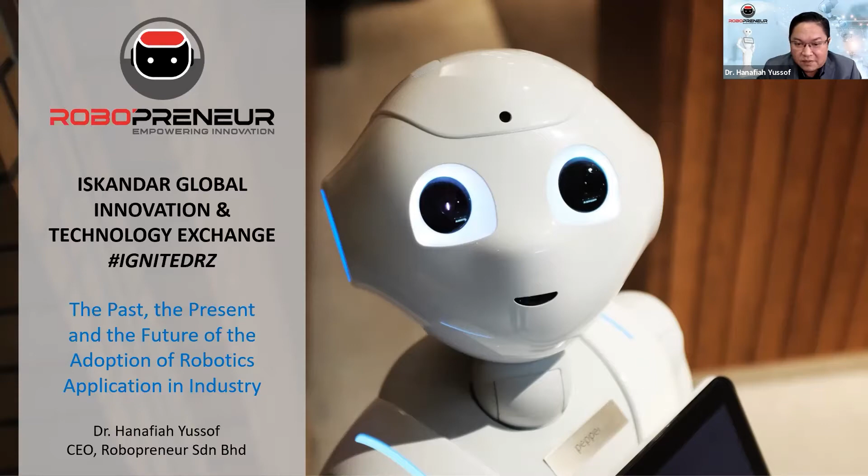Well, the topic is very broad, and I think it's impossible to cover everything in 15 minutes, but I'll try to focus on important subjects. Knowing that the attendees today are very keen and passionate about robotics and drones, and that we have our Malaysian National Robotic Roadmap currently towards establishing the Malaysia Robotics Policy, I will elaborate the history of robots towards the future in three main elements: the industrial revolutions, robotics technology growth, and the combination of robotics and AI.

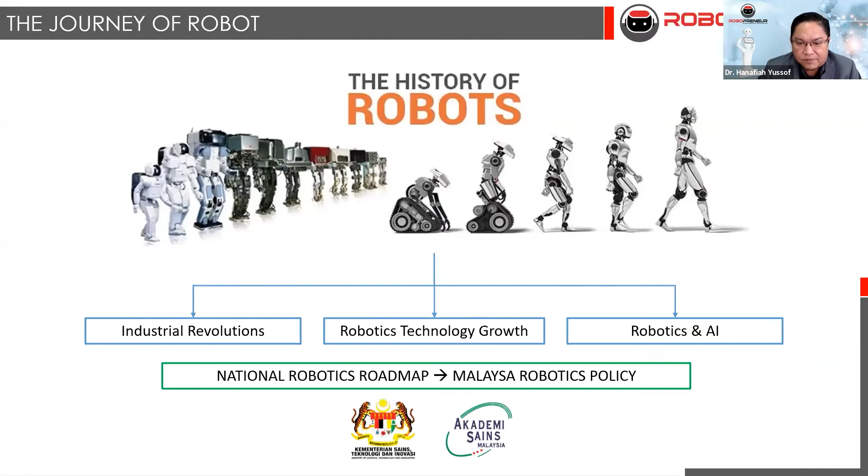Before I go further, I'll let everyone know that I'll be quoting some data and findings compiled for the National Robotic Roadmap, of which I'm one of the committee members.

From the Industrial Revolution perspective, everyone knows about our Industrial Revolutions, and recently Malaysia has launched our first IR 4.0 policy. I think robotics will be one of the main pillar enabler technologies to succeed in this policy.

Looking back at Industrial Revolution history, in Industry 1.0 robotics just started, very much focused on mechanical hardware design, mostly manually operated to help humans lift heavy objects, mechanization and so on, with quite limited usage.

Moving to Industry 2.0 in the 19th century, robotics became more prominent in helping industry succeed in mass production. At this time the mechanics of the robot were combined with electronics, and some simple low-level programming was introduced to increase speed, and automation began.

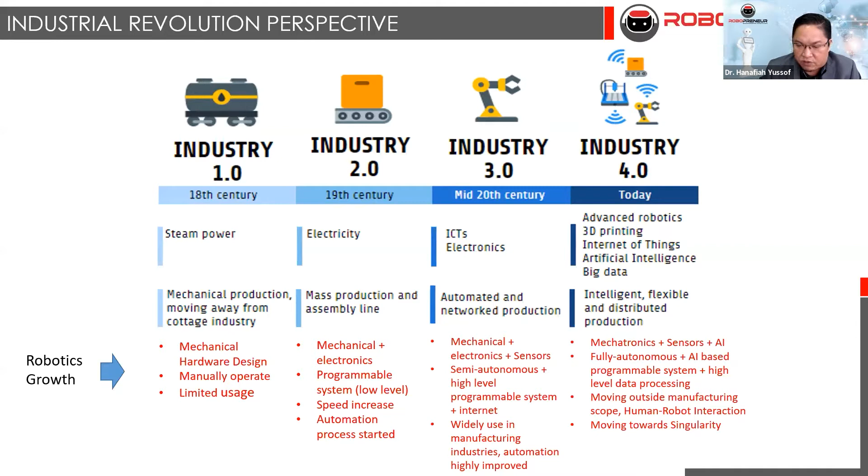Towards the maturity of AI in future, we are actually moving towards singularity. This singularity is one interesting topic, maybe we can discuss it - the event where AI becomes very intelligent, more intelligent than the capacity of human thinking.

From the perspective of robotics technology growth, there are 5 generations of robots. Now we have seen a lot of robots in industry - these are classified as the first generation, focusing on industrial and manufacturing automation. The second generation is moving towards service robotics, where robots become more common in daily life, used as a medium to solve human problems. It already goes out from the manufacturing landscape to be more human friendly, more intelligent, more interactive, and also mobile.

The third generation is ubiquitous robots. This is where the robot becomes more intelligent and able to work with different devices, connecting them into a smart environment - it is networked. It has the capability to understand human emotion, and it is being used to accelerate digital transformation in industry and businesses.

The fourth generation is a very interesting topic. We are still at the R&D level, where the robot becomes more genetic - an artificial species that combines some biological aspect into the robotics structure. Nowadays we have artificial skin, artificial muscle, soft robotics, and this is the main component pushing towards genetic robots. The highest level, the fifth generation, is biorobots.

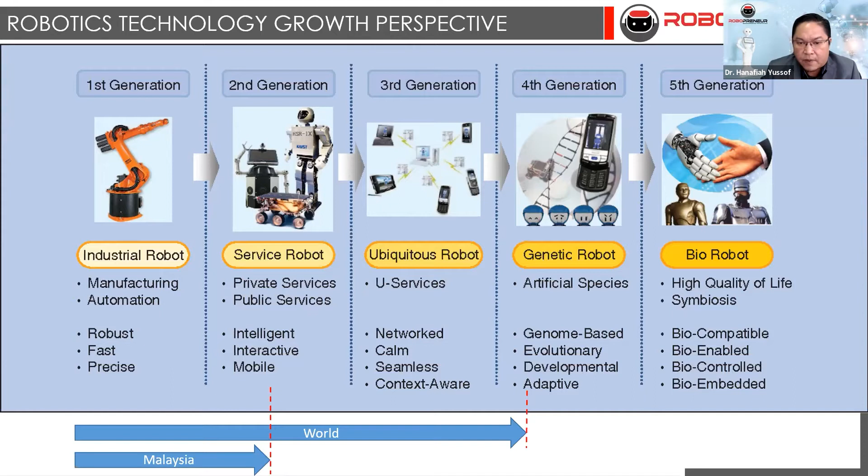From the robotics and AI perspective, I will use this chart from PwC talking about the journey of robotics and AI. At the early beginning of the 20th century, the AI concept was introduced, using Turing tests and evolving the 3 laws of robotics, with some testing conducted at this time. Starting from 1950 and above, we already had intelligent machines, the transformation from manual operation to semi-auto, and robots able to connect between computers and clouds. We have also seen connectivity evolve together with the growth of internet technology.

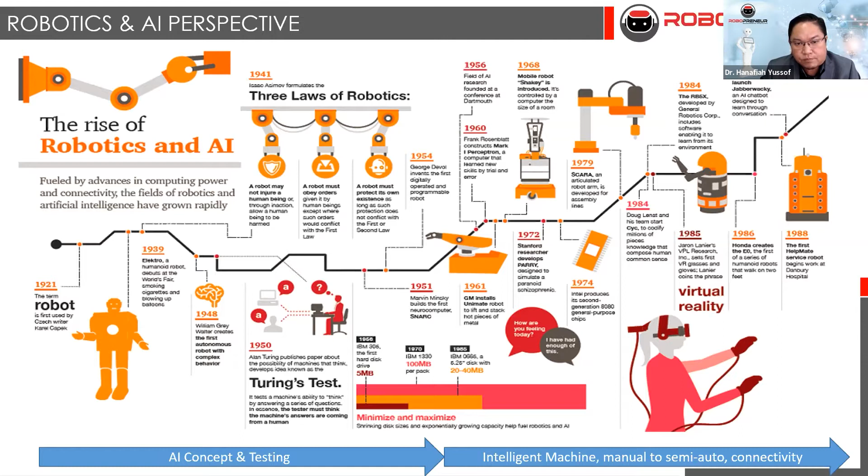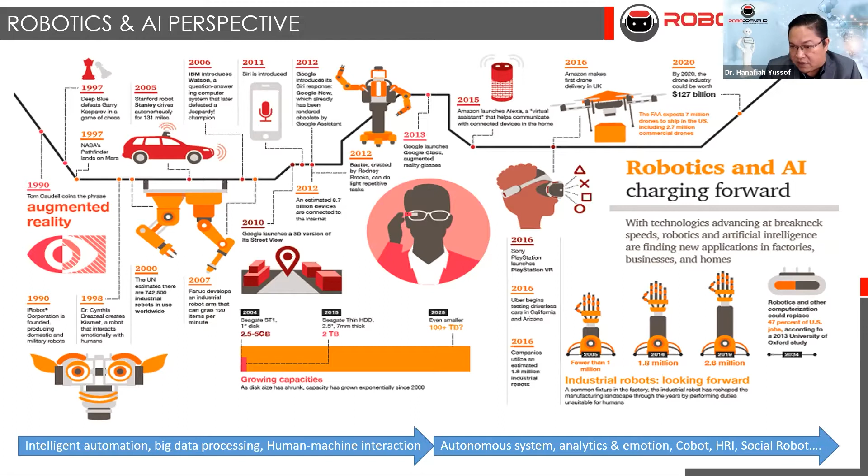Moving forward into the 1990s, we have intelligent automation, big data processing, and human-machine interaction - this is the beginning of Industry 4.0. Nowadays and moving forward, we are experiencing a lot of autonomous systems, high capability robots to do analytics and understand emotions. We have collaborative robots, a maturity of human-robot interaction, and nowadays a term so-called social robots. This is a very accelerated area - we believe that if previously it took about 50 years to transform between one segment to another, with this speed of internet and data processing, robots and AI become much faster to adopt.

Before we go further, I will introduce the real classification of robotics taken from IFR. We have 3 classifications of robotics: industrial robots that work in manufacturing, service robots that work outside manufacturing, and collaborative robots, which is the area overlapping between industrial and service robots, where human and robot work together on the manufacturing side.

If we define based on hardware platform, we have robots with 2 legs, called biped, and 4 legs, quadruped. We have mobile robots, AGV, flying robots, UAV, underwater robots, called ROV, robotic arms, and also crawling and climbing robots. This platform is the pillar for how we want to strategize the development of robots - we have to see what are the basic platforms we want to develop for that particular robot.

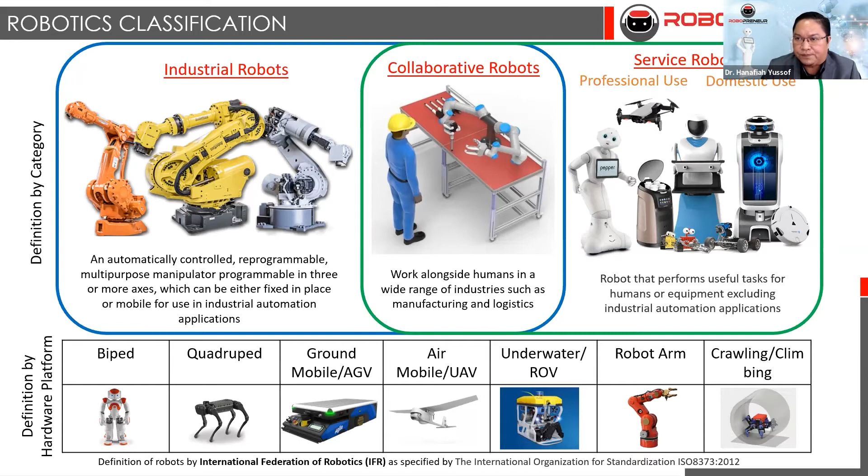So robotics, AI, and automation are actually 3 important keywords which are intercorrelated with each other. They complement each other in the way that for modern robotics, it's no longer a purely hardware structure. It needs some sort of intelligence and cognition provided using the intelligence of computing for AI. And then we have the way of doing things, which is automation, where we automate some sort of process, and robots become the enabler for these automations.

For the application of robots in various industries, we need to have a lot of R&D, innovation, prototyping, and commercialization before we can actually apply it to industrial, professional, and home use. So both automation and AI are very vital for successful robotics development and ecosystem. Eventually, thriving robotics technology will lead to new applications and adoption. This is actually the main pillar that will give impact in terms of economy and social life, so it's a very important technology that we need to focus on.

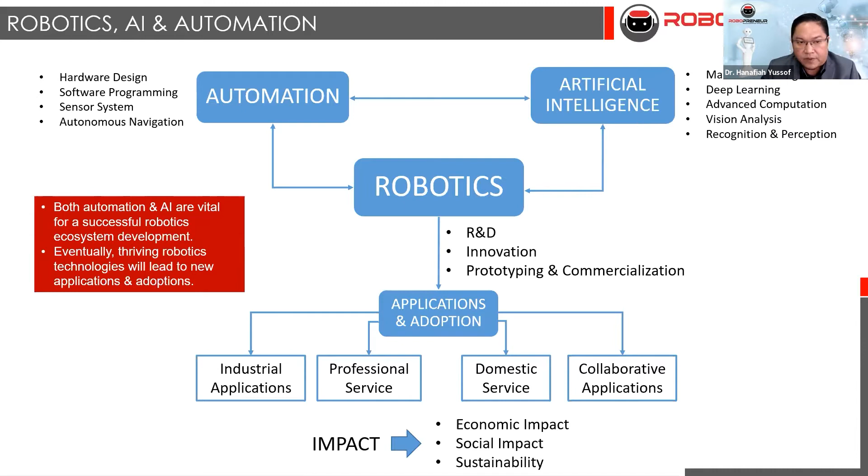So now I will explain more on the trend and market of robotics. The global trend right now is still very much focusing on manufacturing in terms of the quantity of robots that have been deployed. But then there are a lot of areas that robots are being involved in. For example, in medical and healthcare, security and surveillance, warehouse automation is a very important segment right now for robotics application. Service and consumer also, yeah.

There's a lot of robots that are being used as partners, as a medium to help restaurants, hotels, and so on. And very importantly for Malaysia, we are focusing very much on food and agriculture because our country is basically an agriculture country. And there are some elements in robotics that have diversified into other smart systems, where sensing and vision play an important role for robots to combine and collaborate with other smart systems.

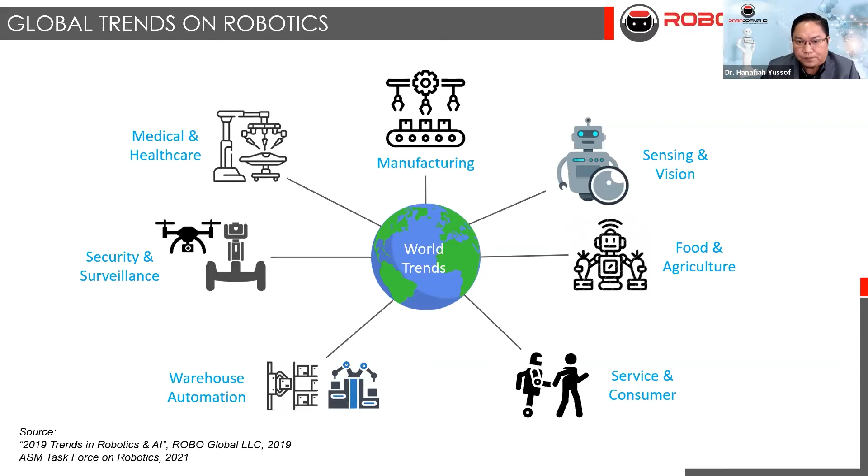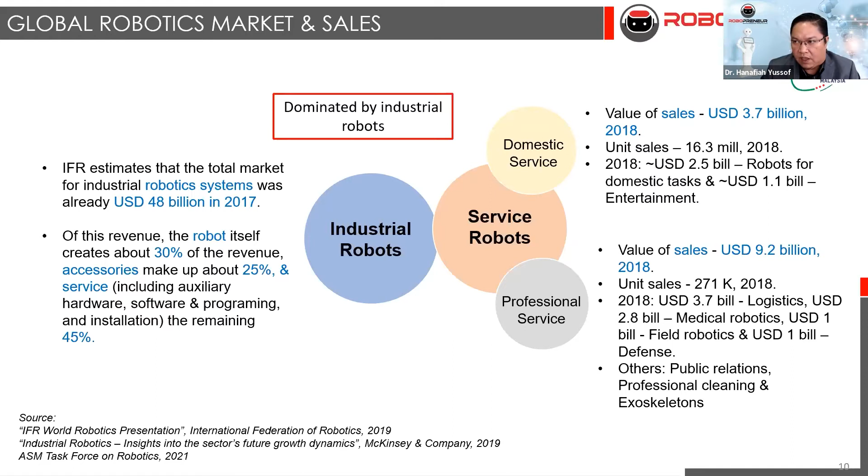Looking at the robotics market and sales, it's still very much dominated by industrial robots. But the growth of service robotics is quite interesting, where the number of robots being sold globally for professional service and also domestic service is actually growing very fast. The importance of this robot is moving from the dimension of doing very day-to-day operations to becoming a robot that is able to collaborate with humans, and this is able to solve a lot of problems in non-manufacturing areas.

This is a chart taken from IFR, the annual installation of industrial robots. We can find this report on the IFR website. But the thing I want to highlight here is that Asia is the largest market of industrial robots. The number of deployments in Asia is actually the highest, meaning that the market in Asia, where we are - Malaysia is in Asia - we have a better chance in terms of application of robotics in industry.

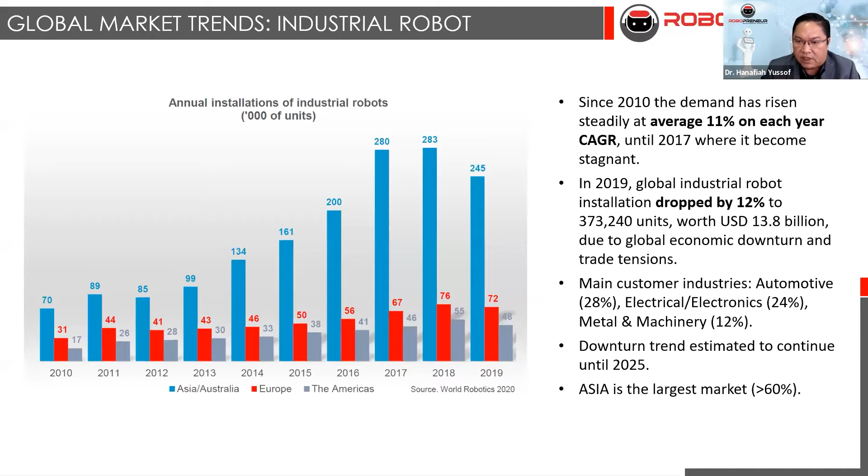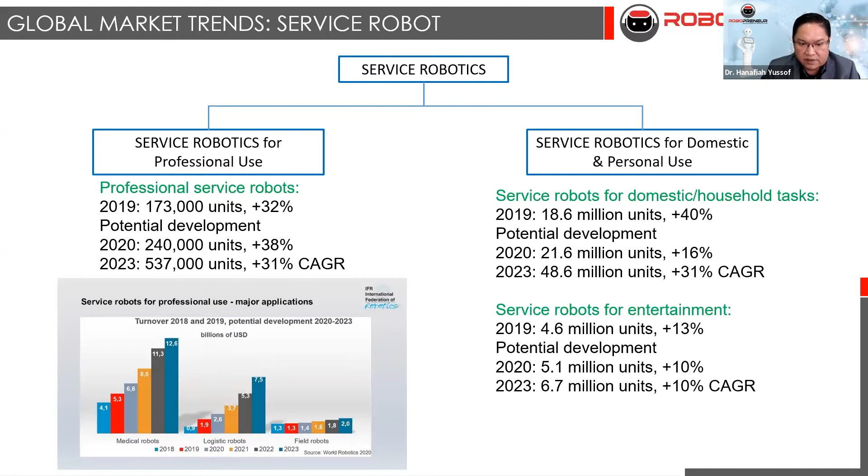So this is service robotics. We have seen growth in service robotics for professional use and also some domestic use. I would like to highlight here the 4 areas that are growing right now in service robotics. The champion now is logistics, followed by medical, field robots, and defense.

This is some typical examples of how robotics is being used in today's industry. Like Amazon - if you order anything from Amazon, most likely your order will be handled by one of the 200,000 robots in Amazon's warehouse. And the history of SoftBank, by acquiring Aldebaran Robotics to develop Pepper, and then Boston Dynamics, which they recently sold to Hyundai. And SoftBank Robotics is now the biggest owner of AutoStore, a solution for warehouses. We also have this company called Zoox, providing autonomous car solutions. They are at the highest level of readiness right now, and it's quite interesting to see how they're going to deploy in the mesh environment.

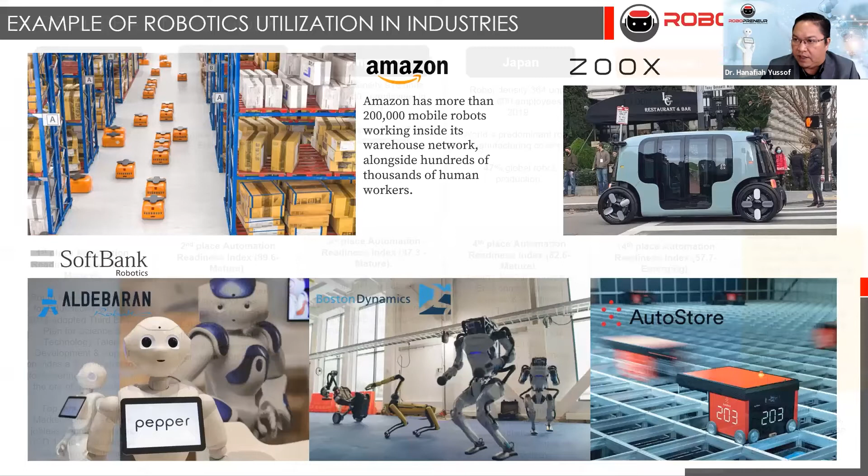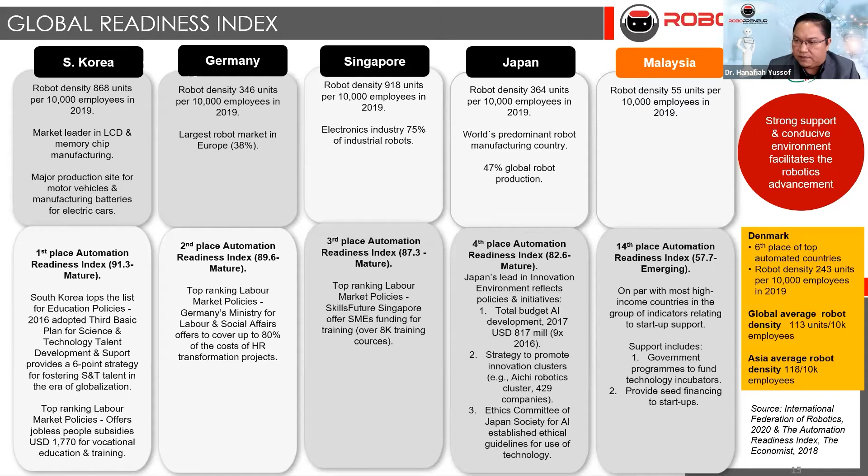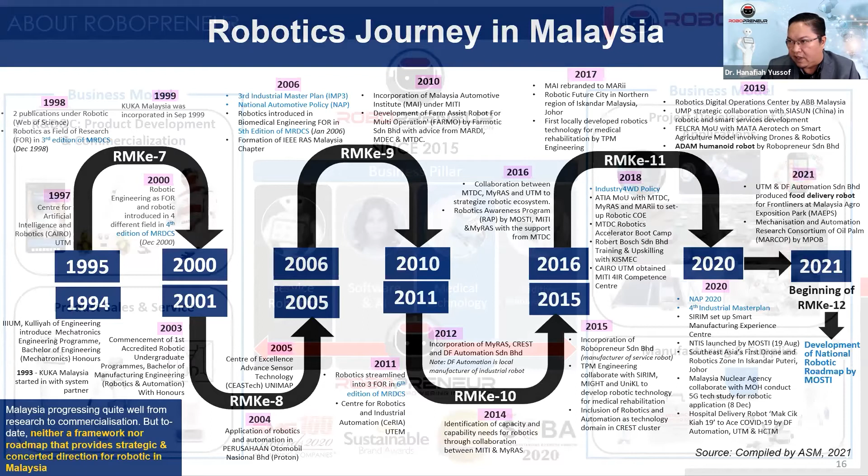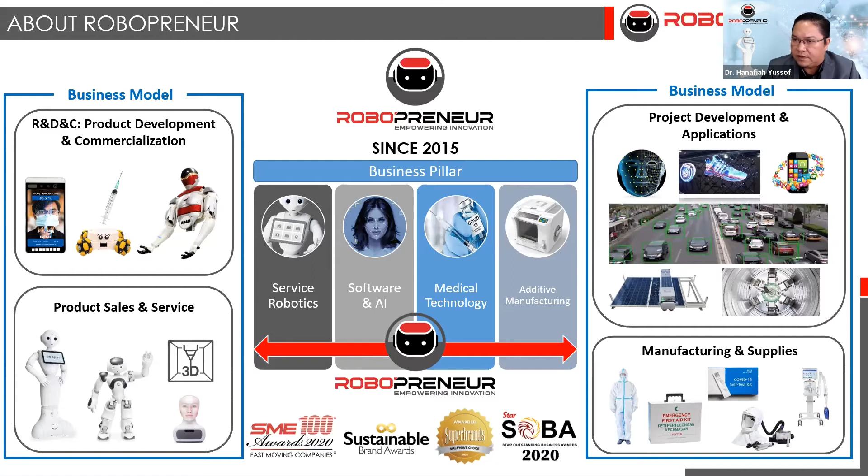Doctor, we are currently slightly out of time. We'd like to see whether you can speed up and wrap up your thoughts so we can proceed. I think that's all for 15 minutes - it's very short. Maybe we'd need 1 or 2 hours to explain everything, but it's okay. We have another round of forum session after this where we can have a discussion. Thank you, everyone.

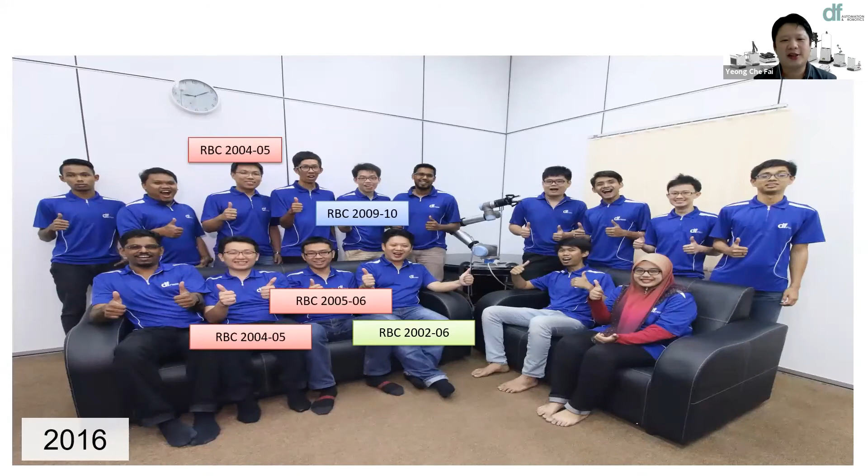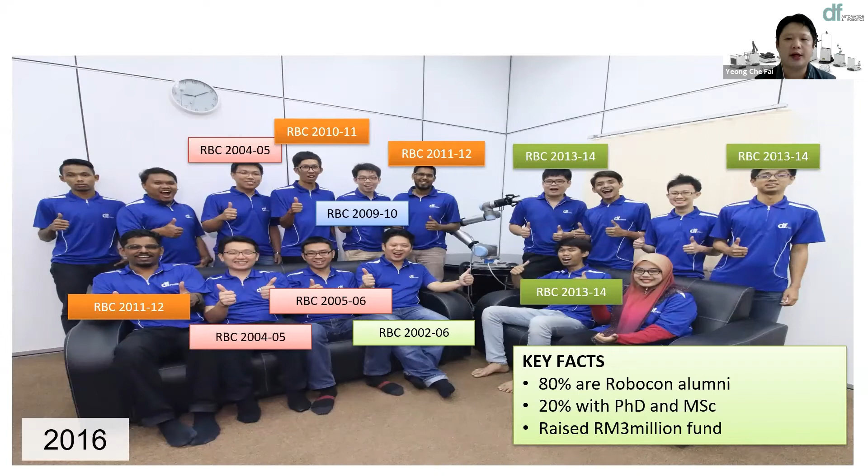Then in 2014, we had more students grow the business. In 2015, we increased more. In 2016, if you look at this group of the team back then - this is everyone who joined RoboCon, which was held in Malaysia. RoboCon provided students a way to learn their talent and polish their skills, and then DF Automation had the opportunity to hire them. Then in 2017, we increased further.

And this is 2019 - we already had 60 staff. And this is actually the picture we took just before the MCO. Of course, we cannot take this picture anymore.

So in a very short period of time, about 8 years, we increased from 3 founders to about 60 or 70 right now. It's thanks to the ecosystem in Johor Bahru, and also because we are very near to UTM.

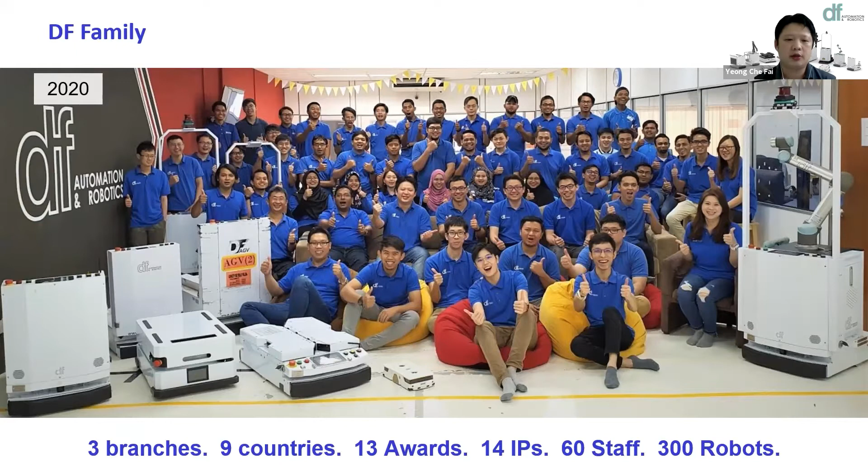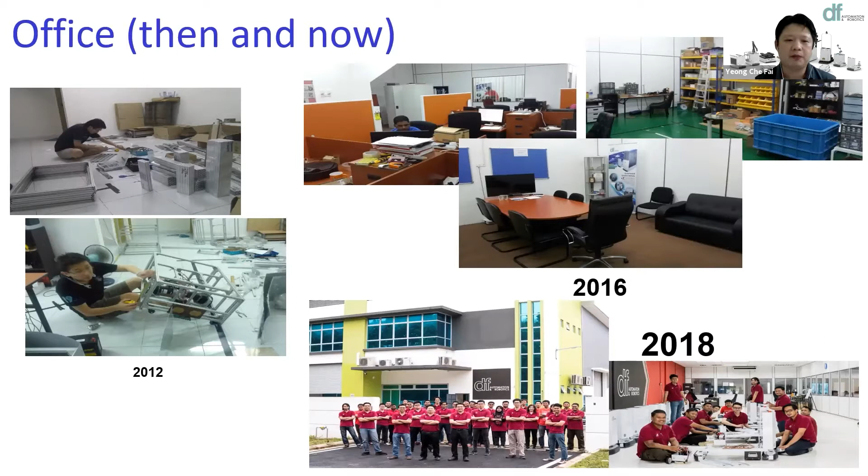When we first started, we didn't start big, we started from home. Then we used a shop lot in 2016. In 2018, we had a factory. As of now, 2020, we have 2 factories in Johor Bahru, 2 branches in KL and Penang, and also a branch in India. That's pretty much my journey of entrepreneurship.

So I just want to share a bit about DF Automation.

Our customers are really manufacturing plants that are huge, about 20,000 square meters.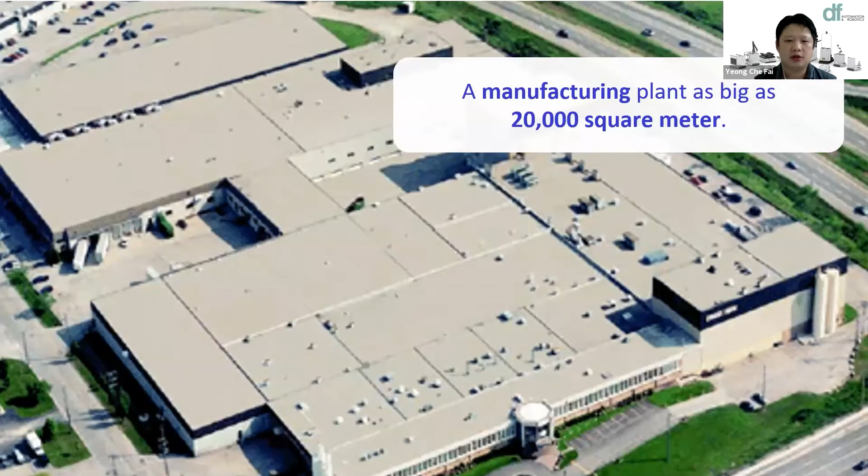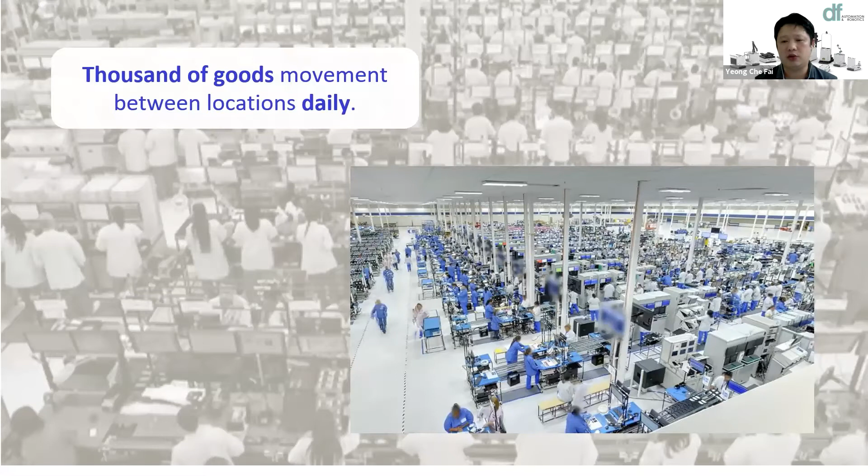Every day there are 1,000 goods movement between locations daily, either from warehouse to the production line, or from the production line, after they finish goods, they go to delivery and so on. Most of these operations are carried out by workers and operators, and some of these workers need to push or carry up to 500 kg per day and walk up to 3 kilometers. So these are huge problems.

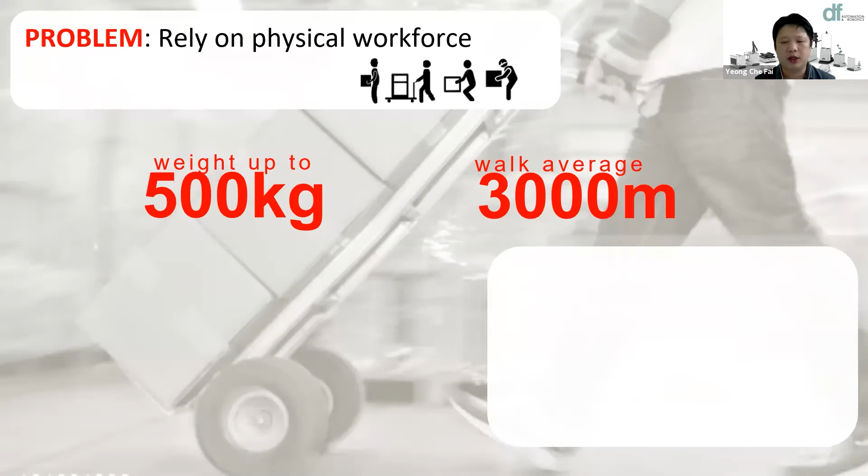This is a low skill job, with human factors and cost issues. A lot of companies are looking for how to solve this, and the government too is looking at how to improve this situation.

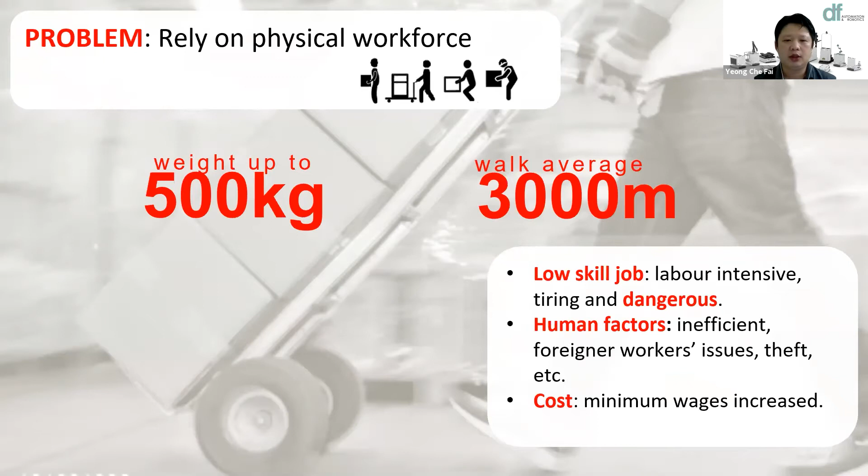As Dr. Hanifah mentioned earlier, AGV has been around for a very long time, since 1950. It works, but was unable to achieve full usability. Back in 2012, a company asked us to do one, and in fact we asked them to buy one instead. Then we realized that most robots back then were quite difficult to program, not flexible, and very, very expensive. So that's why we started our business in this field.

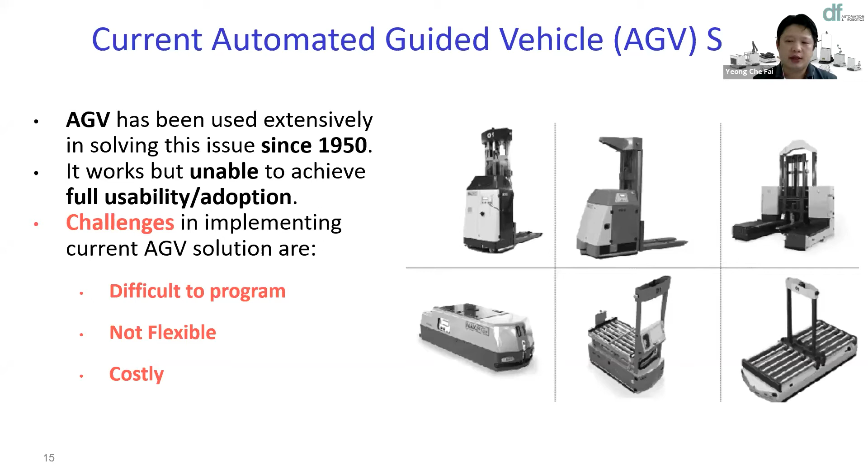The middle photo shows all the robot models that we have right now, and every year we try to have 1 or 2 new models coming out. Our vision is to become a global market leader and expert in providing Industry 4.0 AMR products and solutions, and our mission is to provide high quality products for our customers.

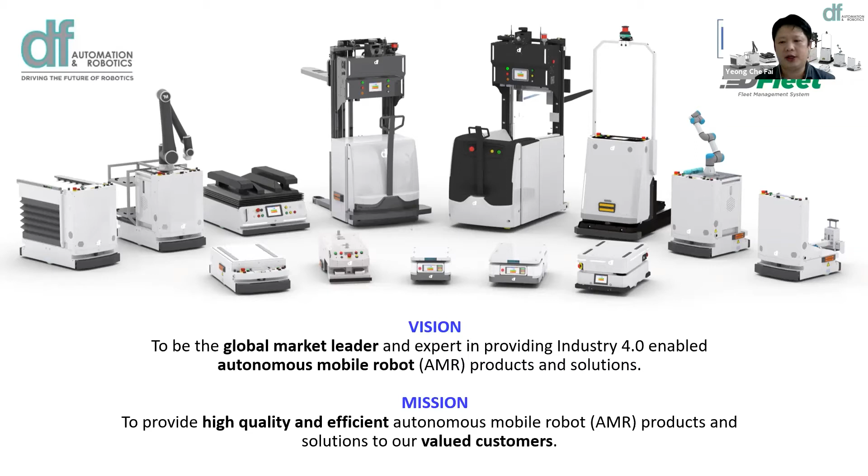I just want to share, this is a very typical AGV. Of course, you have sensors, motor, battery, and so on. I will quickly show a minute of video.

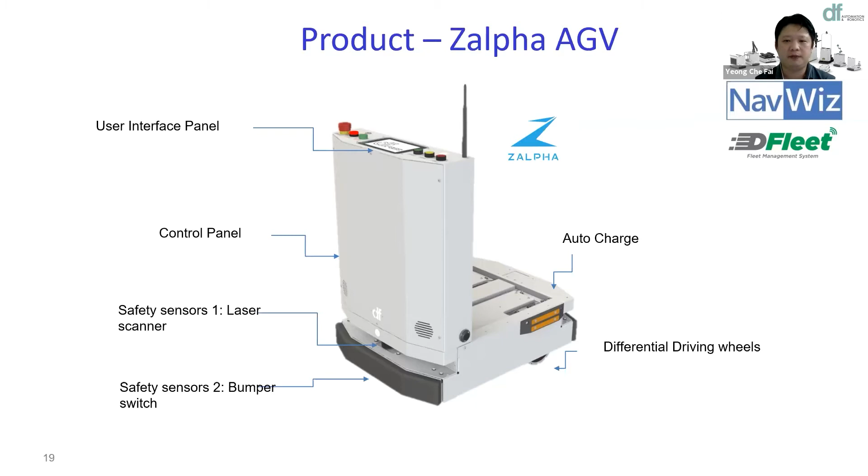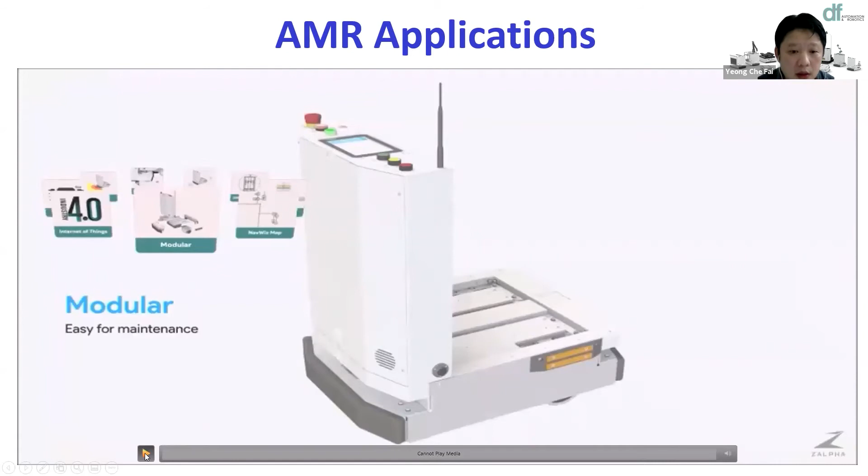If you can click on the video, is it running? It's supposed to be a video. Oh, it cannot play the video. That's fine. So if you're not able to see the video, you can just go to our YouTube and you'll be able to see it.

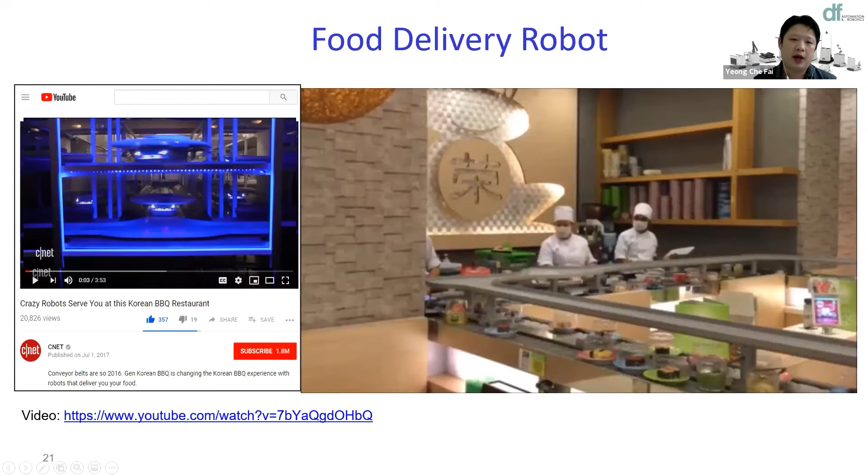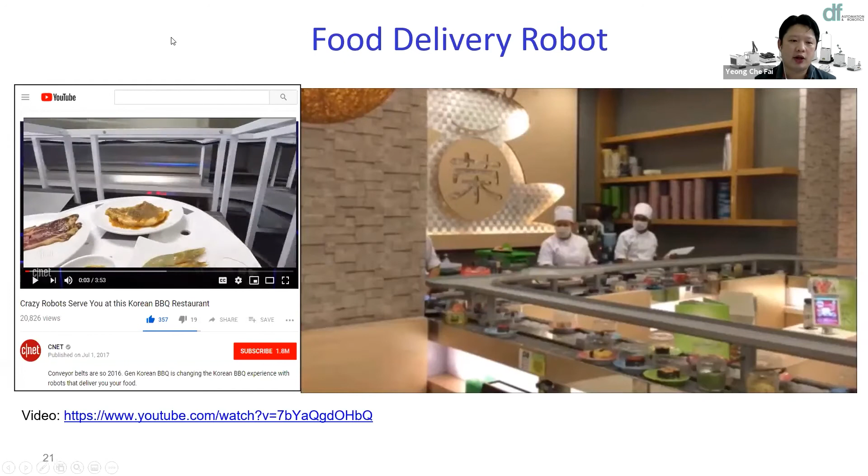The video I planned to show is actually an application in industry. The one you see right now is actually an application used in a restaurant. When you order food, the robot sends you the food. The one on the left is actually featured by CNET, this robot is currently in San Francisco in a Korean restaurant. The one on the right is one used by Zamai in Kuala Lumpur. If you've been to some sushi restaurants now, like Sushi King or Zamai in Malaysia, you may see this robot. So this is from DF Automation.

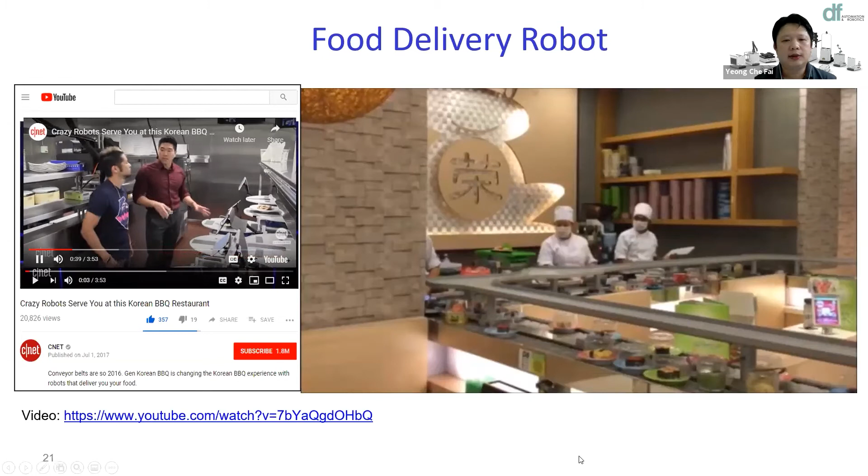We can do a lot more other stuff, like the robot with a robot arm. You can imagine this as smart manufacturing, smart warehouse kind of stuff. You normally hire like 20 to 50 people in a warehouse, but right now you can just use one robot and this robot does everything for you.

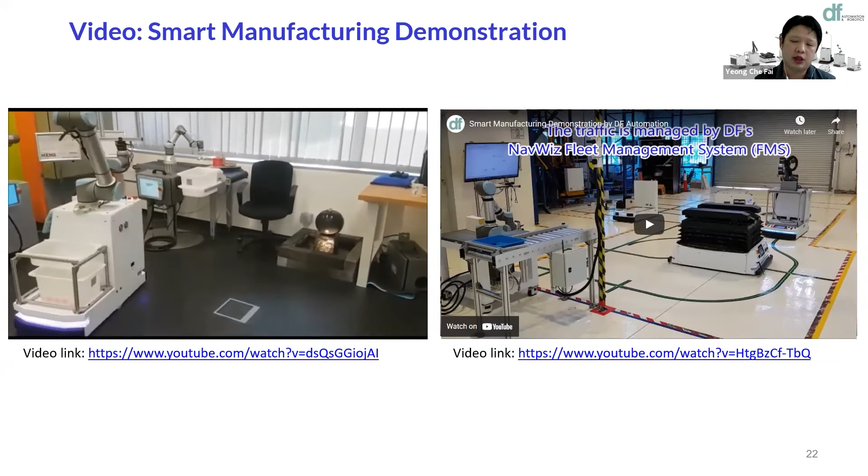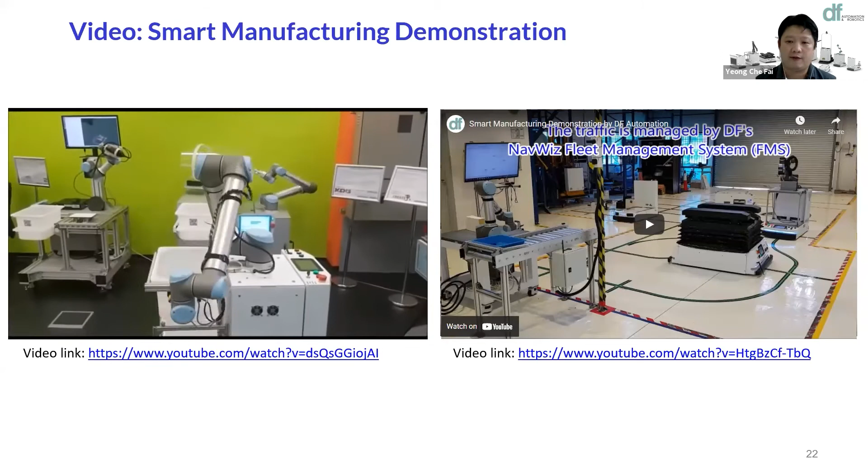It can go to the warehouse, to the store to pick up, then move autonomously to the production line to do the job, with vision, with camera, then come back. So we are trying to look into reducing workers completely in a factory. That's the whole idea of smart manufacturing.

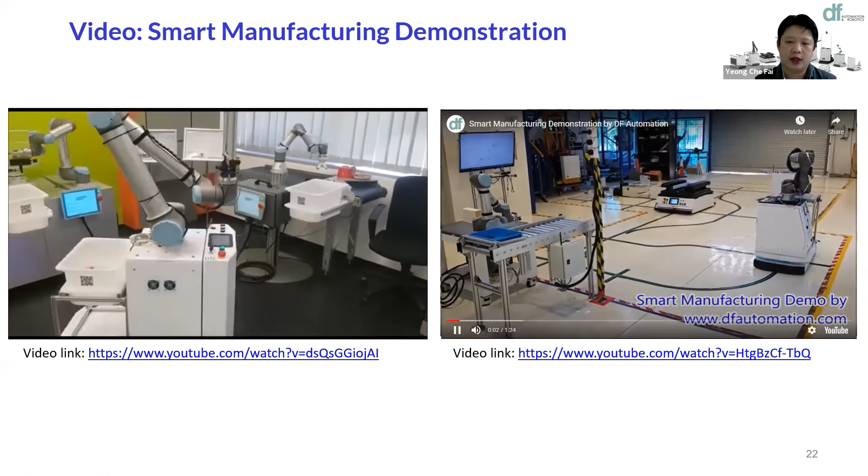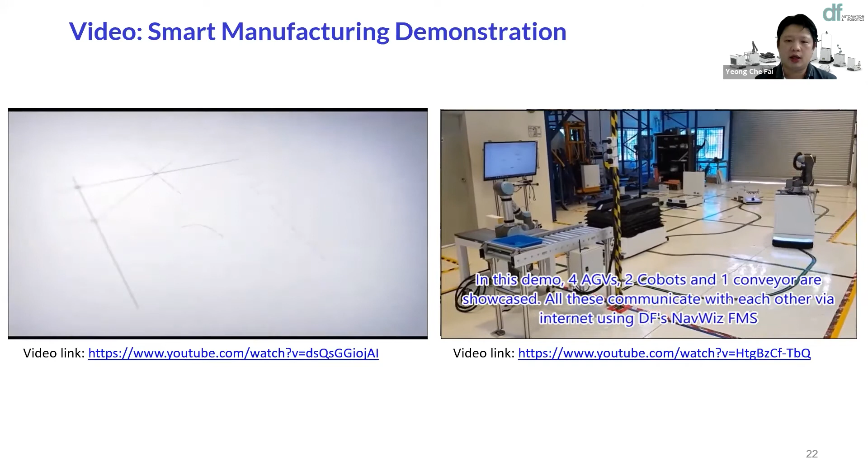The right one is just an illustration of how we communicate with all the robots together. In fact, there are multiple products out there. Our product, AGV, 4 AGVs, 2 cobots, one is UR from Denmark, one is TM from Taiwan. Then we have a standard conveyor, and all kinds of different robots, and they all communicate together.

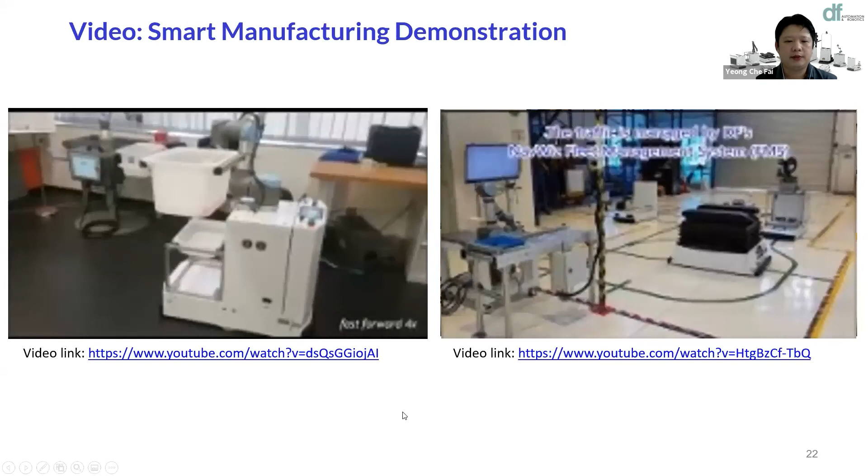So these are other deployments. The key reason why they use a robot is straightforward. In Malaysia, the return on investment between 2 to 4 years is to reduce labor reliance, enable customizable product, and support Industry 4.0. But compared to Singapore, the return on investment is less than 1 year.

I just want to quickly touch on the story of Mak Cik Kiah, because as DF Automation, when we were in lockdown, we could not do anything.

All of a sudden, the Prime Minister announced the MCO extended. Then we thought, hey, we have to do something. So at home, we just did some sketching and said we want to design a robot to help the hospital.

So these are some of the sketches, made on the 25th of March.

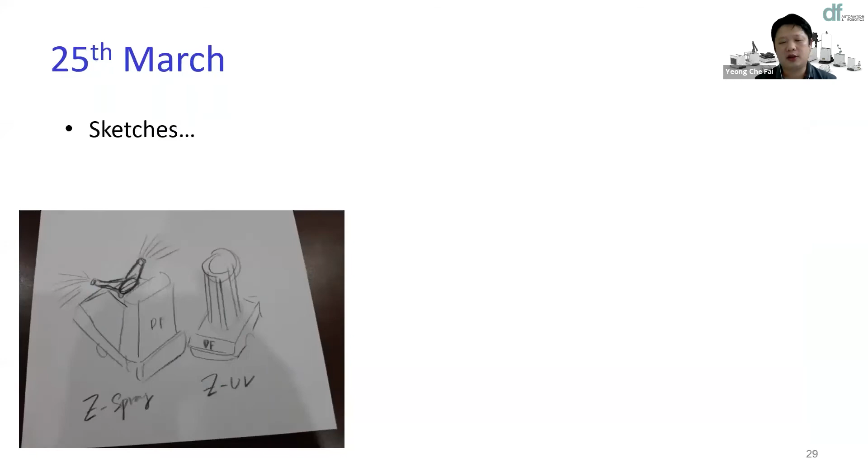We published an article, because at the time we wanted to help, but we didn't know who to look for. After we published this, some organizations grouped us together to see what we could do.

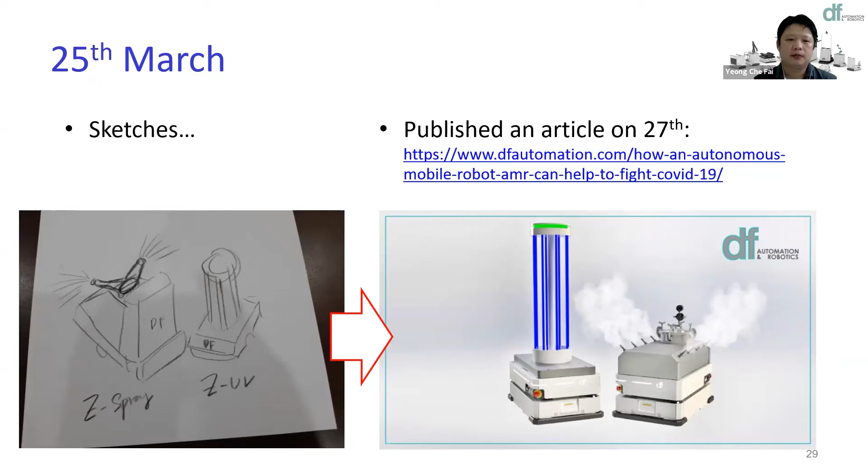Then we went into the hospital. At that time, going to the hospital, we saw the problem. One of the things we could do faster, what we call low-hanging fruit, was the food delivery robot.

During the MCO lockdown, we had thousands of WhatsApp messages to communicate with each other, a new way of communicating. We produced hundreds of concept designs, lots of video conferencing between every stakeholder, and tons of media coverage.

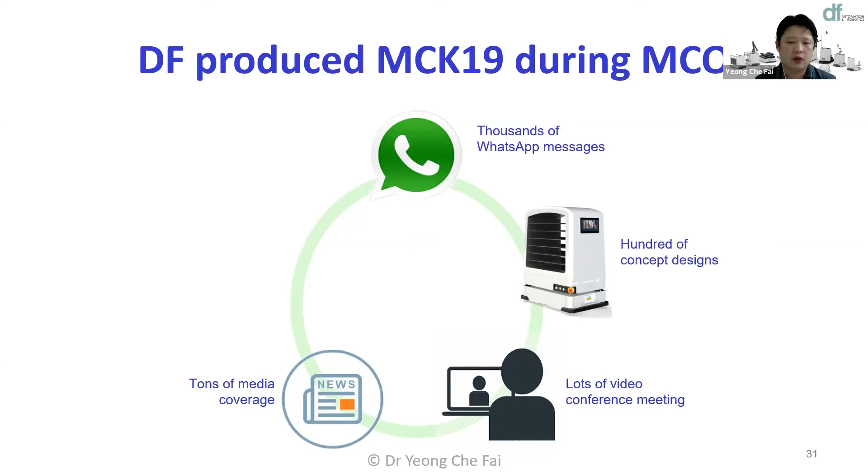And we had one Mak Cik Kiah. This is the MCK-19 story that we developed back then.

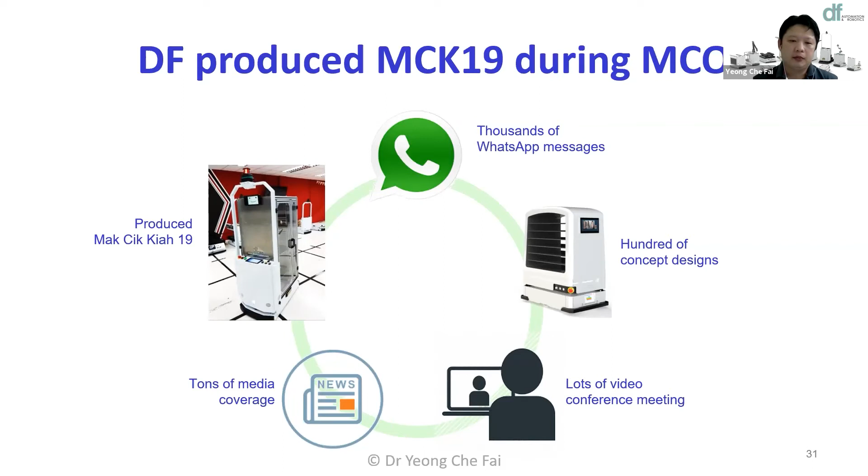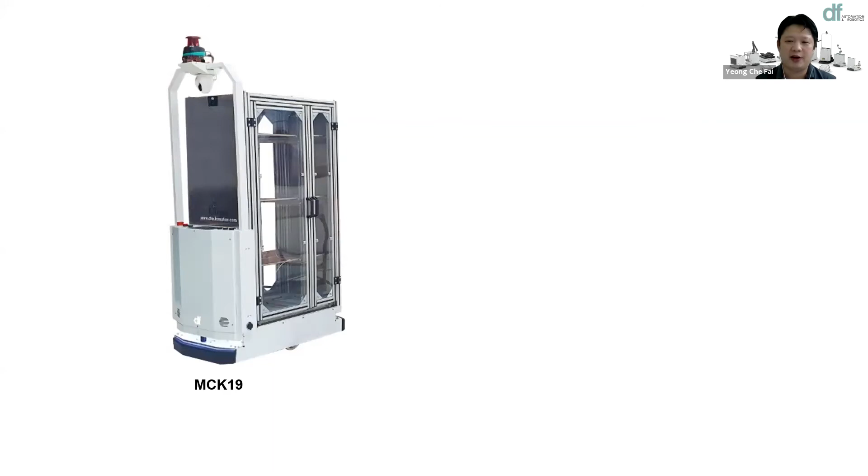When we shipped this robot to the hospital, the very next day we got a request from MAEPS. They said they also wanted the same thing, but again, we didn't have another robot. And we had a bigger challenge: they wanted it in 2 days' time. So we used a simpler design called Dol-E.

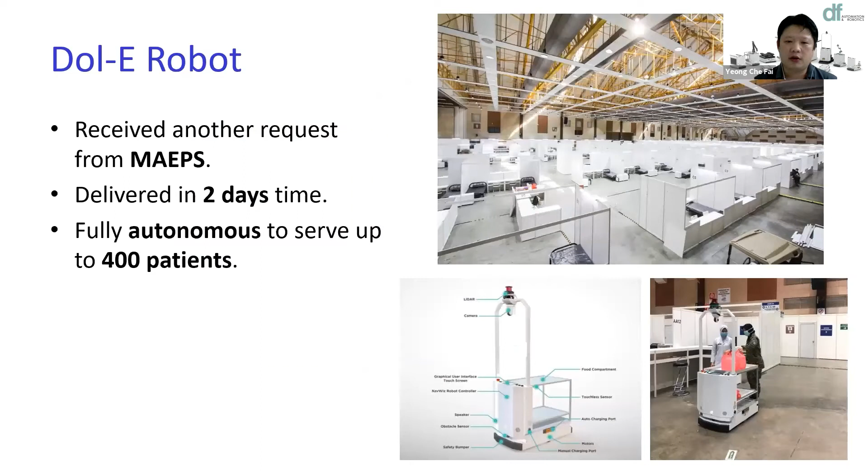So we sent the robot to serve 400 patients. Let's see if the video is running... Yeah, it's not running, so you can just Google Dol-E and find this robot.

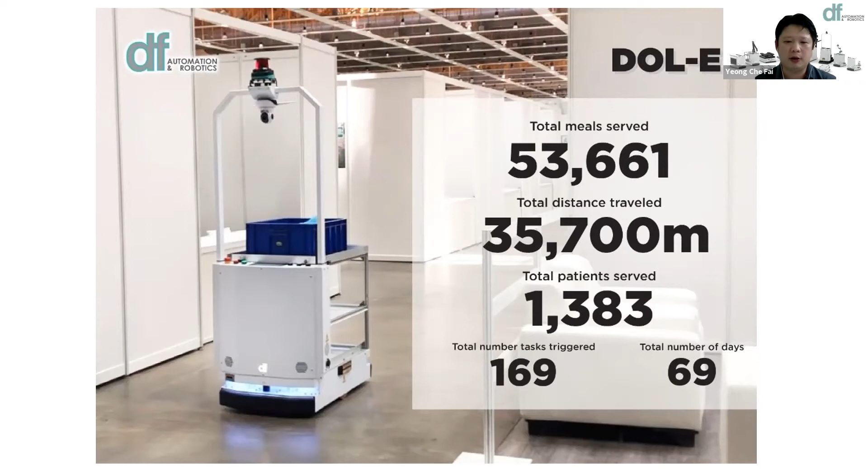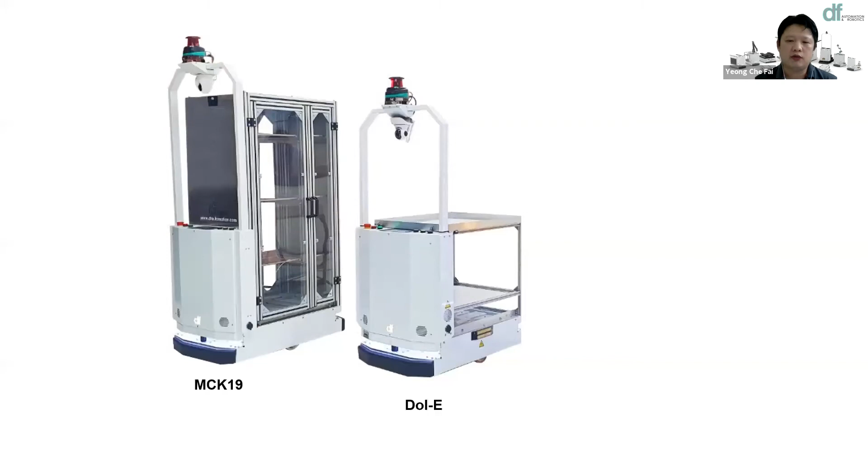Just want to share the timeline: the first MCK19 took 17 days, then DOL-E took the next 2 days. After that, we were thankful to get the NTIS sandbox for this project, and then we got a commercially viable look for this robot. So that's the journey.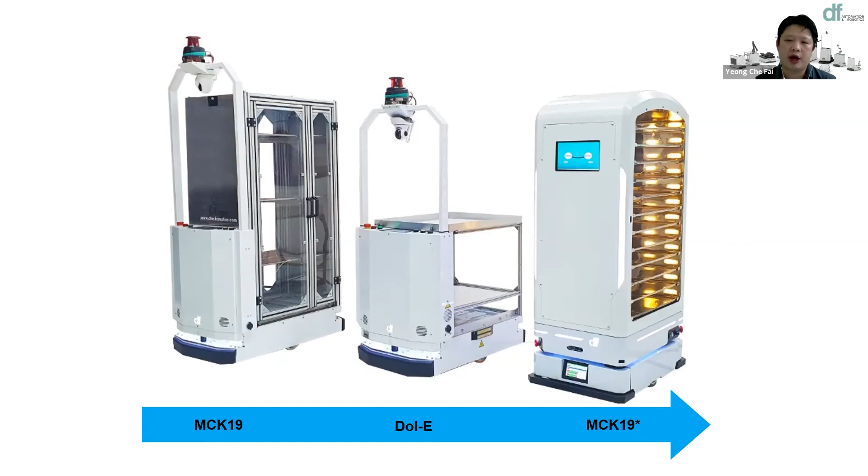DF Automation is based in Johor Bahru. Every year we come up with 1 or 2 products, and these are some of the new robots we plan to launch: the MCK-19, the UV disinfection robot, Qube, Zetha, and the autonomous stacker robot. If you ask me, DF is actually focusing more on this Zetha and the stacker robot, the industrial robots.

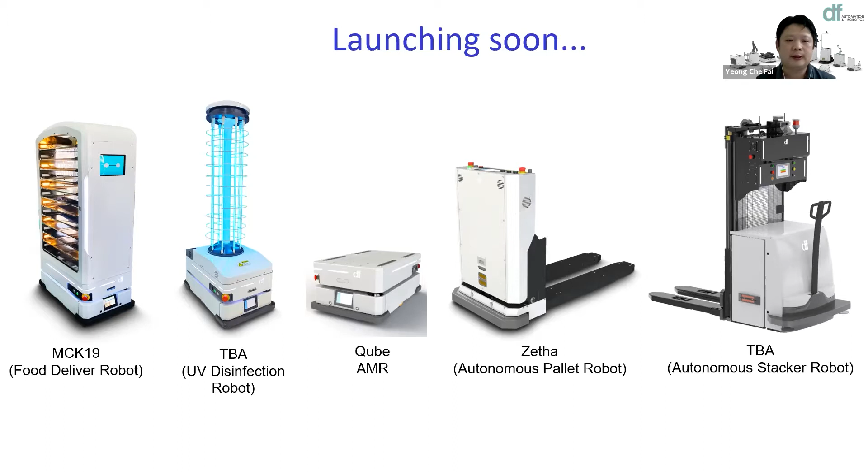The challenges were really significant during this incident, the COVID. DF suffered a lot of reduced sales activity because we could not meet customers, the supply chain was disrupted, projects were delayed, and we still needed to maintain full salary for all staff. But again, during these challenges, there's huge opportunity.

We had been trying to penetrate the healthcare sector for the last 8 years. When we first started, we could not penetrate it, to be honest. But during COVID, we penetrated healthcare within 1 month. Right now, there's a lot of incentive for robotics, and also because of this, there's so much more awareness on robotics.

And we just closed the investment round, actually. We're going to announce it soon. So again, the greater the challenge, the greater the opportunity.